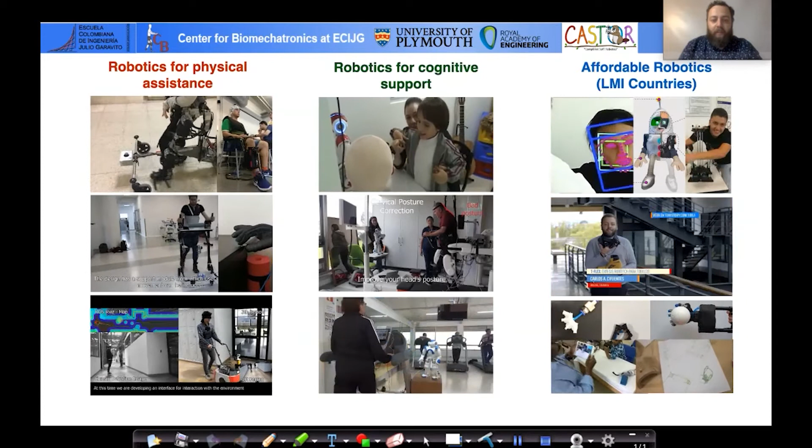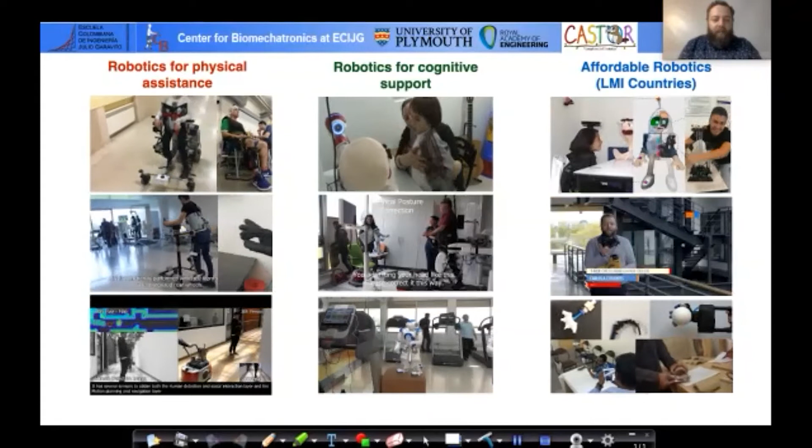So we can summarize our works in 3 lines. Firstly, robotics for physical assistance. In that part, we have been working in development of several wearable robots for the treatment of different pathologies like cerebral palsy, stroke, or spinal cord injury. You can see in the videos also exoskeletons for lower limb, ankle joints, and also hand exoskeletons. And we combine these devices with smart walkers. These devices also help patients or users in mobility and in some applications in daily life.

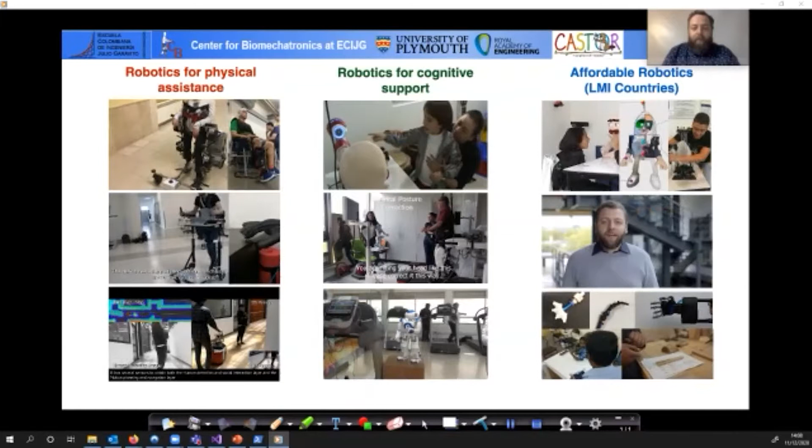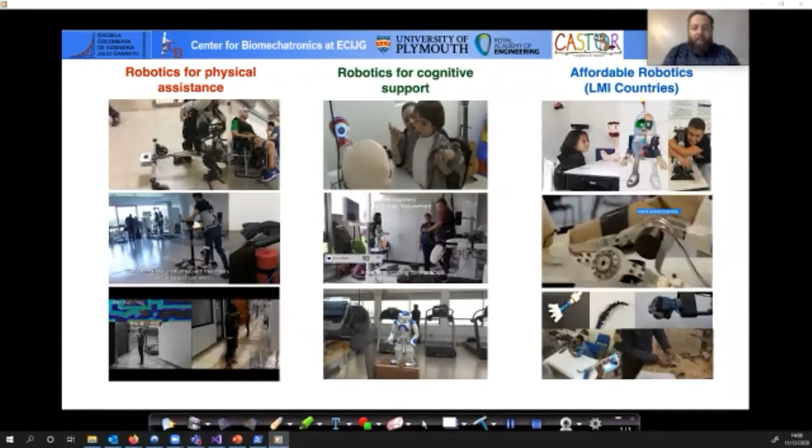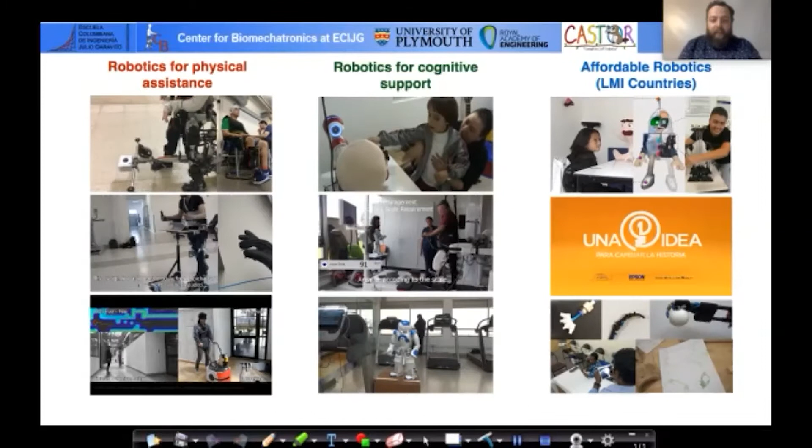In the center part, we can see robotics for cognitive support. These robots help clinicians in the daily work. Firstly, you can see robots for autism, that is the main topic today in this talk. And you can see also robotics that work with clinicians in several scenarios like neurological rehabilitation, where the social robots are focused on specific variables that are important to follow up the patients. In that case, the robot is helping the clinician measuring the posture of the patient during the treatment and encouraging the patient to perform a good posture during the treatment, which is very important in this kind of rehabilitation.

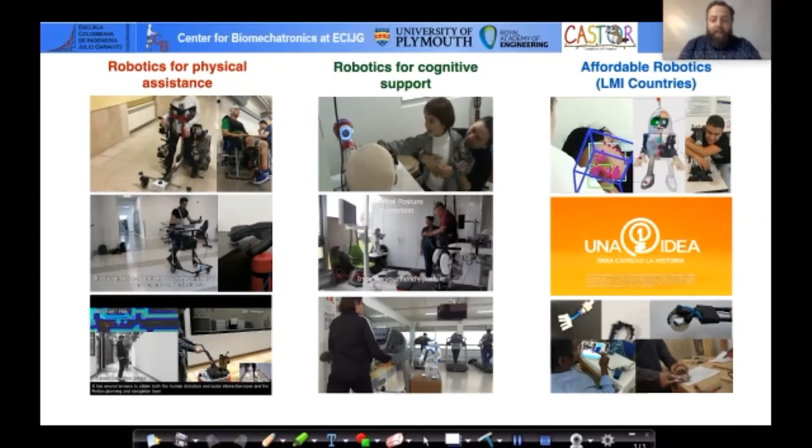After that, you can see robots supporting cardiac rehabilitation, which is also one of the works that we are working on with researchers of Plymouth University. In that field, we have integrated several sensors to monitor the patients during the treatment, encouraging them to develop the long-term treatment of rehabilitation. We have many publications in this part, and hopefully we can disclose this later.

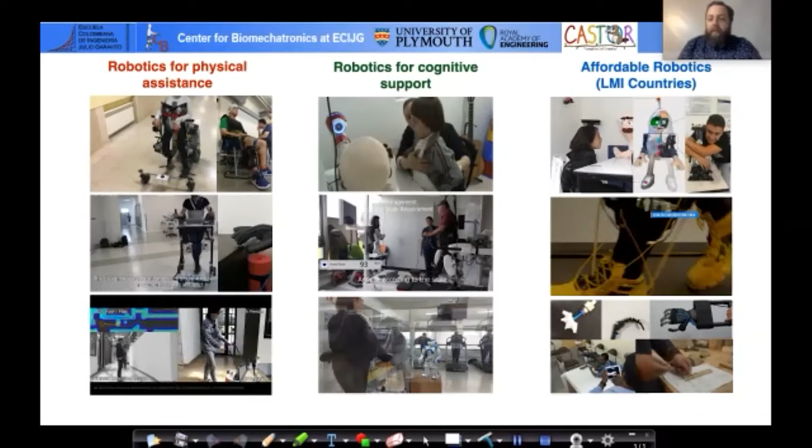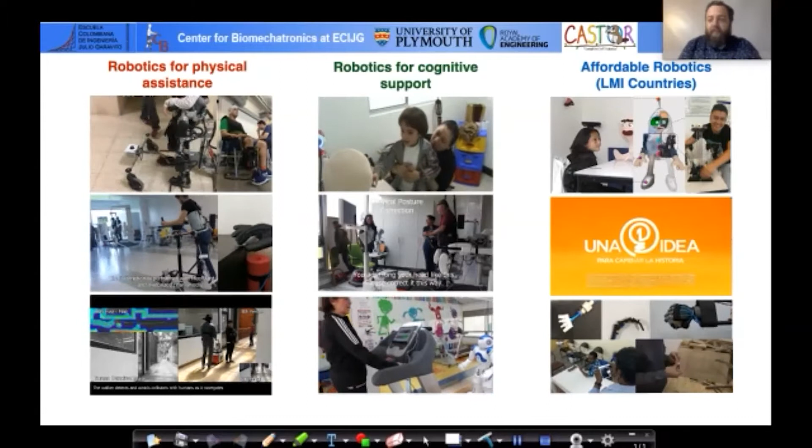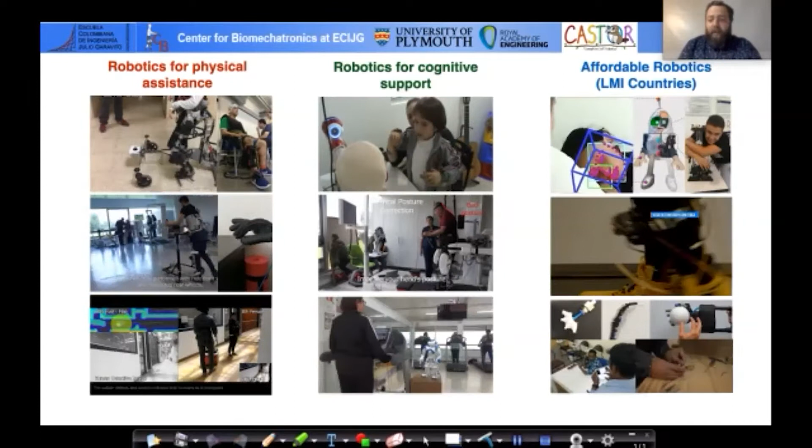In the third part, we can see affordable robotics, where we are developing open source robots in order to be transferred to clinics to develop treatments or studies in clinics and also in universities. These are affordable tools made with 3D printing and open source hardware. You can see the CASTOR robot that we will talk about today, but also T-FLEX, which is an ankle exoskeleton, which is also free access in GitHub. And also you can see a hand prosthesis that we are developing at this time.

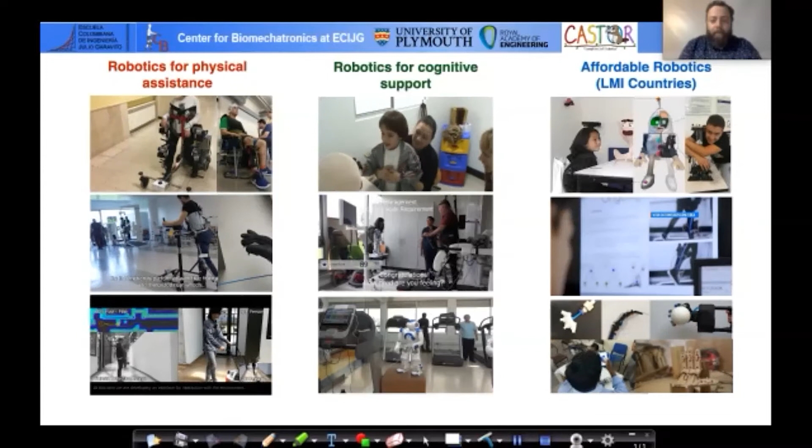So this work is impossible to do only with our group. We are collaborating with many groups around the world, some companies and some universities in Latin America, Europe, US and UK, of course, and in Japan.

Our collaboration with Plymouth University started in 2016 when we got the first project funded by the Royal Academy of Engineering with the program Industry Academic Partnership Program, Colombia, UK, which is focused on integrating one university in UK, one university in Colombia, and one company.

In that case, we collaborate with a company that develops or commercializes robotic tools in Latin America, and we developed several studies to understand the possibilities of social robots in some scenarios like neurological rehabilitation, cardiac rehabilitation, and ASD treatment. As you can see, this has been a great part of the work in our group, and this project was called Human Robot Interaction Strategies for Rehabilitation based on socially assistive robotics.

You can see in the pictures that we did many visits to Plymouth, and researchers and professors from Plymouth came to Colombia to develop seminars and research. It was a very interesting project that is still giving a lot of outcomes in research with the topic that I told before, which is the cardiac rehabilitation.

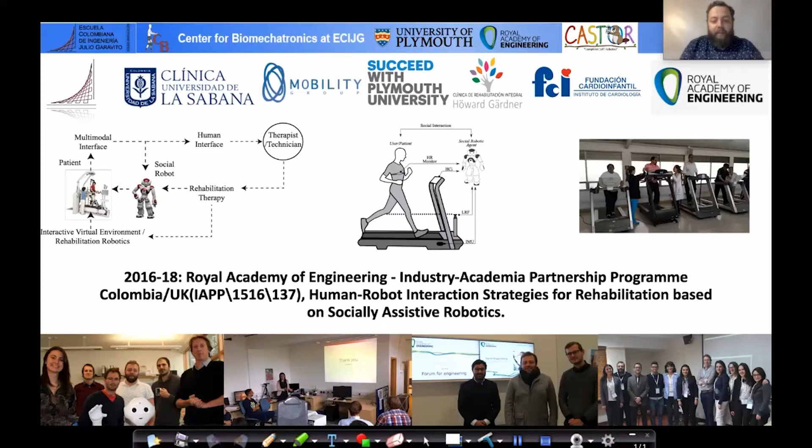One of the outcomes of this project was this study in which we involved 30 children and 12 therapists, and we analyzed how they developed the treatment, the ASD treatment, and we understood that this is a therapy that is performed almost daily during the week. And what are the interactions between the clinicians and the children?

We can see physical interactions to promote good posture, reduce bad habits, provide instructions, train emotions, and also other interactions. And we also asked the clinicians if they see the robots as useful in their work, and we saw that around 70% of the clinicians say that the robots are useful or very useful.

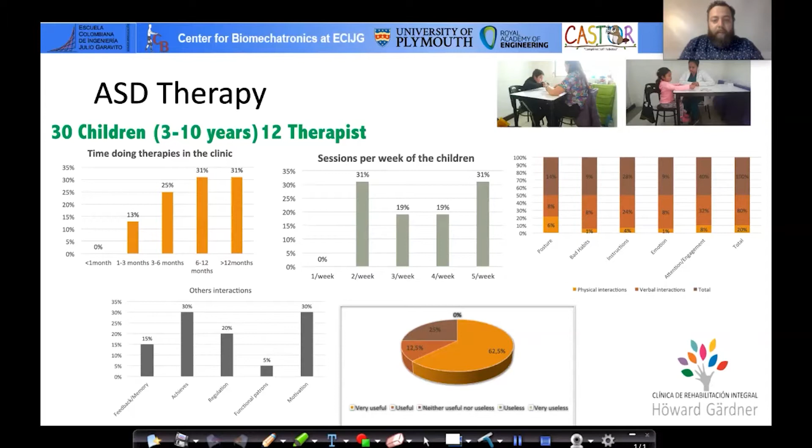We started to study the literature of socially assistive robots in autism, with experience also at Plymouth University with Professor Tony Belpaeme. There is evidence that robots assist in the diagnosis process and also improve risk factors like eye contact and joint attention, and also increase self-initiated interactions. And during therapy, robots encourage basic communication, imitation, and emotion recognition. So you can see in the video some examples of successful robots in therapy and also commercialized around the world.

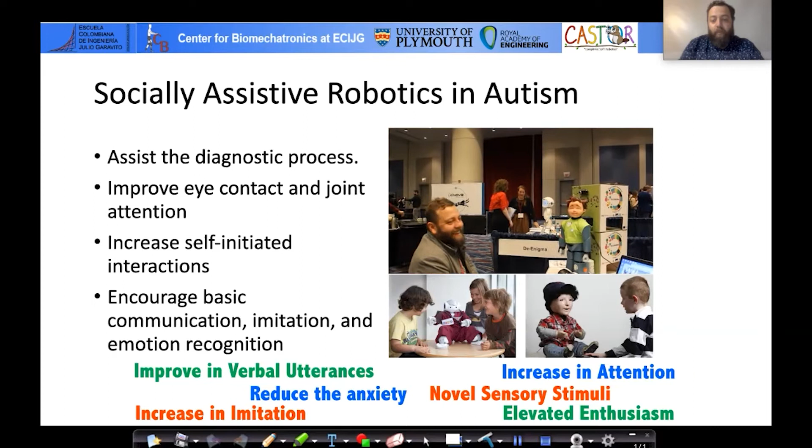And to deploy the robots in Latin American clinics, or in general in developing country clinics, is complicated because the robots are hard and stiff and unsuitable for physical interaction. So these robots can be harmful for the child or both. And we can see in the video one open source robot, which is the Ono robot that we usually use in this research, but we found that it's very fragile, and also we had some problems with the NAO robot.

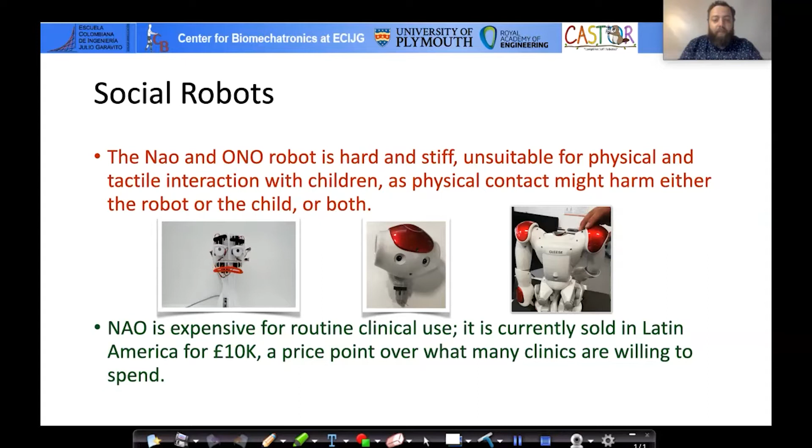We had some broken robots in the lab, and we had to send them to the US to get them recovered and back to Colombia to continue studies. So it's quite expensive, and the price in Latin America is around £10,000. So it's difficult to manage for any clinic in developing countries. So this is the main problem that we want to address with this research.

And we can see here the three objectives of this project. So we started with the design and the evaluation of a social soft robotic platform, looking also at open source platforms. The second objective is oriented to develop a soft actuation system, looking at physical interaction. And the third objective is oriented to develop sensor subsystems to monitor the interaction with the children.

So this project is mainly led by Plymouth University and Colombian School of Engineering, but there are also interesting collaborators like Tejido de Sueños, which is a company here in Medellin that develops participatory design in many devices and tools for children. They are the company partner in the project, but we also have the collaboration of UFES University, which is a university in Brazil. And the clinic is the rehabilitation clinic Howard Gardner, a clinic with 2 headquarters in Bogota, whose patients will be the main focus of this project.

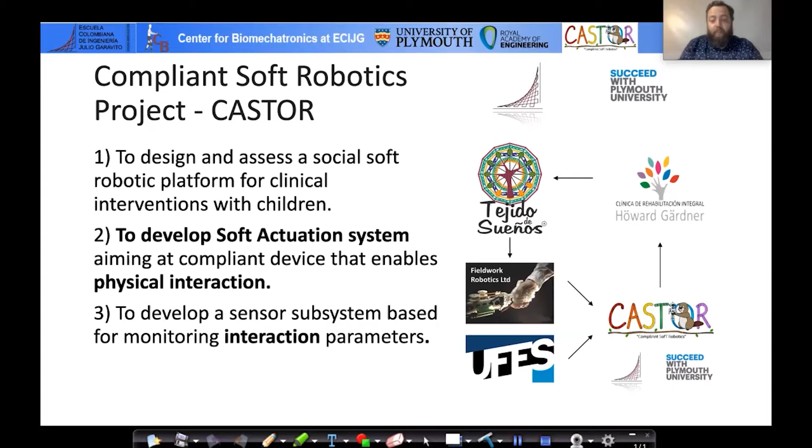We first started to explore the use of social robots using the Ono robot, developed in Belgium, and we integrated this robot and started to develop a sensor system to monitor the interaction between the child and the robot during the treatments. So we started with the joint attention assessment, where we located 3 different objects in our room, and the clinician, the psychologist, asked the child to look at the different objects in the room.

And with a multi-camera system that we developed in this project, with the help of a PhD student from Brazil, we detected the visual focus of attention of the child, and we expected to use this system at that time in the next studies. During the same time, we started to work on the design of the project, on the design of the robot that I will talk about later.

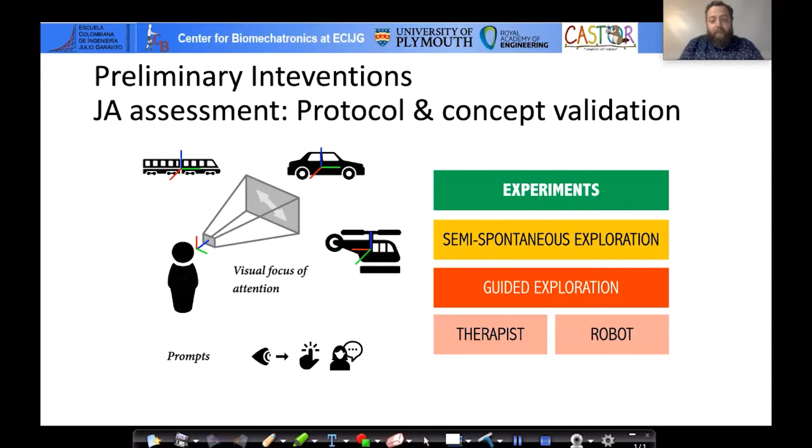So this was one of the outcomes of this project, when we developed a system to detect the face and the orientation of the child and the visual focus of attention, which we present in this article. This is very interesting because we involved a significant sample of children in this study, with two groups: one group of children with autism and one group of children with other special needs like Down syndrome.

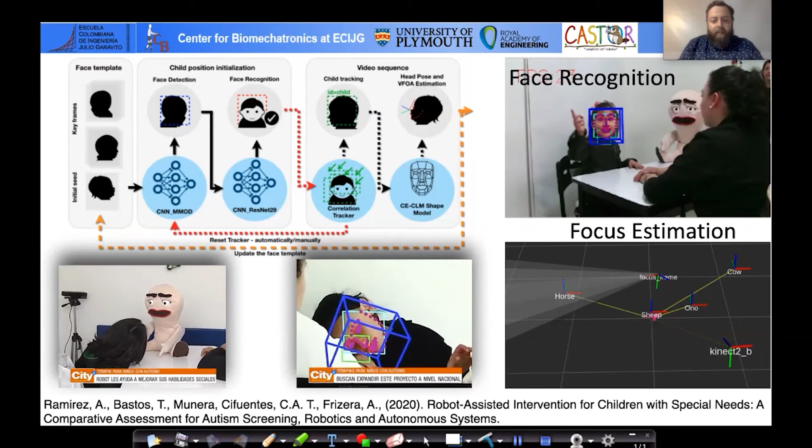And in that case, we evaluated the same therapy and we found specific behaviors of the child that we can demonstrate with quantitative data obtained from the system. And this is a very interesting outcome for the state of the art, that it's possible to detect specific behaviors in children with autism.

And so with this first evaluation, we demonstrated to the clinicians the possibility to collaborate with the robots during the therapy. And it was in part a sensitization to use robotics, to, in the next stage, start to develop the participatory design strategy with them.

But after this study, there were many research questions. One of them is the effects that we see in children with autism, that they are very interested in the robots and their performance actually increases with the robot in the therapy scenario. So we decided to develop a study over 10 sessions, where we were also curious about how relevant the role of the robot and the clinicians is in this therapy.

And we changed the role of the robot. At the beginning, the clinician had 100% of the share of the therapy, and in the second therapy, the robot started to say greetings or some words. So we started to increase the percentage of participation of the robot in every session. In the 5th or 6th session, the robot had 50% and the clinician 50% of the share of the load of the therapy, and in the end, the robot had 100% control of the therapy.

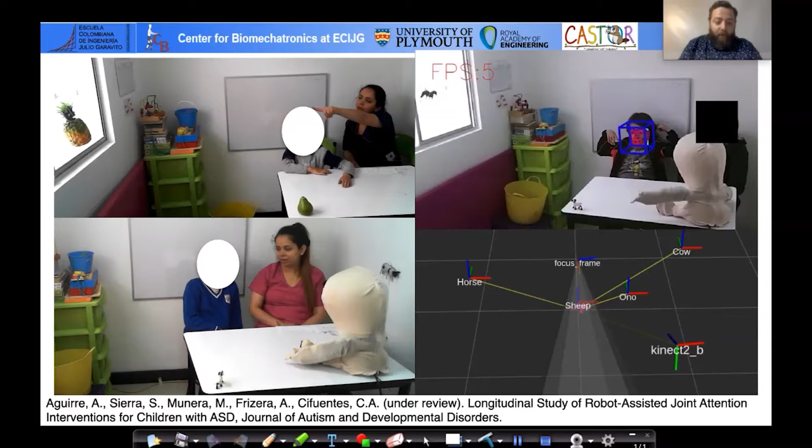So this work is now under evaluation, but we expect to discuss more after it is published, and we hope that it will be accepted. So after performing this sensitization part, some interventions with the robots, we developed a participatory design that is published in this article. And it will be presented in the next seminar with Professor Marcela and Maria Jose. They are also part of the project, and they are mostly in charge of the studies with the children and the clinicians.

So the interesting part here is that we discovered the needs and what the clinicians, the parents and the child expect of the robot, and we found some cultural aspects that are really interesting to involve in the design of the robot. So in the next seminar, you will get more details about this methodology. I just want to summarize all the outcomes of this project.

After developing the whole participatory design strategy, we found that there were three designs that children, clinicians and all the populations were interested in: one design like a robot, one more fantastic, and one like a child. And in this paper, which is also under evaluation, after performing a validation with children, we found that the robot outfit is the best option, the one children feel more attracted to interact with. But there are many details in this study that you will see in the next seminar. So we were also working while all this design part was performed.

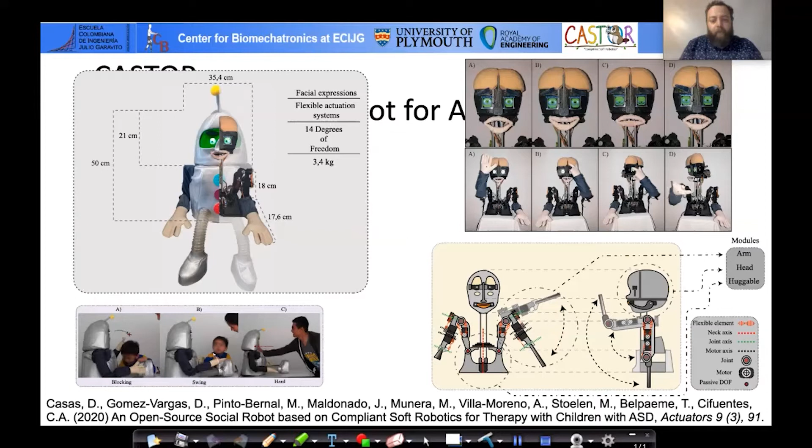At the beginning of this year, we finished a study with children where we really wanted to understand if the physical interaction has real importance in ASD therapy, because at that time we already had the robot, and we also involved a significant sample of children in this study where we compared two groups. One group that was invited to interact with the robot during the therapy, and another group that was prohibited the possibility to touch the robot.

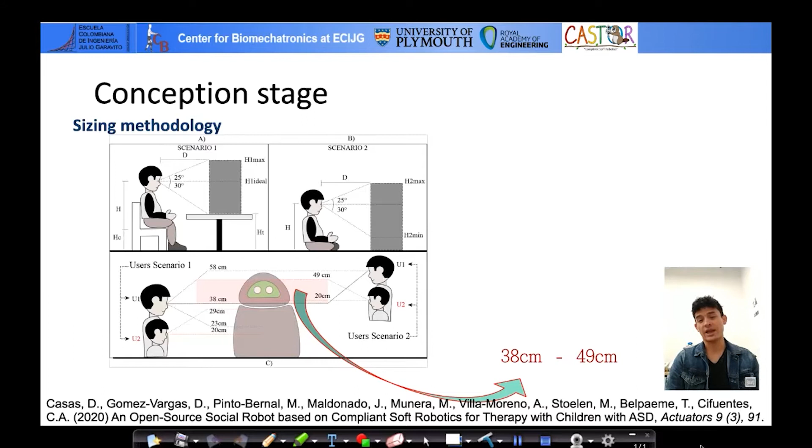Now I will talk about the development of the CASTOR robot. This robot has 14 degrees of freedom to generate the movement of the arm and neck. Additionally, this robot has 1 degree of freedom in the middle of the structure to work as a huggable structure. This robot has 3 main modules, which are the arm module, the head module, and the huggable module. Arm and head modules are series elastic actuator systems, and the other one is a pneumatic system. Those systems make the CASTOR robot a novel proposal.

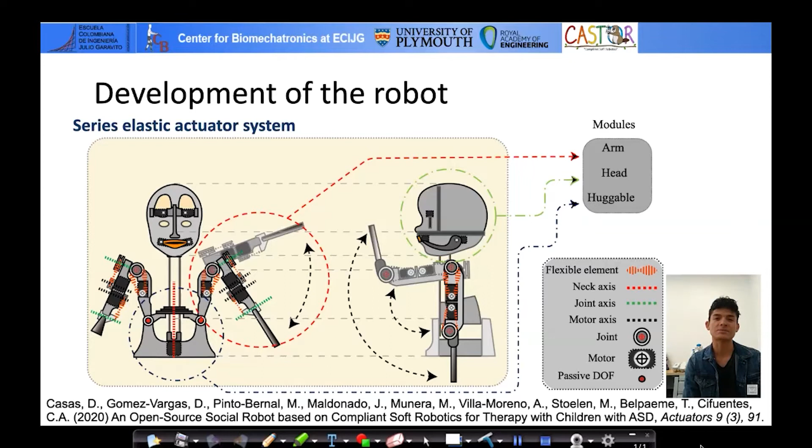This is the first module and is in charge of actuating the head of the CASTOR robot. The head is one of the most critical parts of the robot because it's big and heavy. That is where the electronic system is placed. On the other hand, it's where the children put the major part of their attention in therapy. This system has one elastic element between the motor and the head, decoupling the motor from the direct load.

The elastic element is constructed with 4 aluminum bars, and thanks to the flexion properties of this material, we can generate a part that's able to deform around the motor axis. So when each bar is deflected, our system makes a rotation, absorbing the energy from the physical interaction, as we can see in this video.

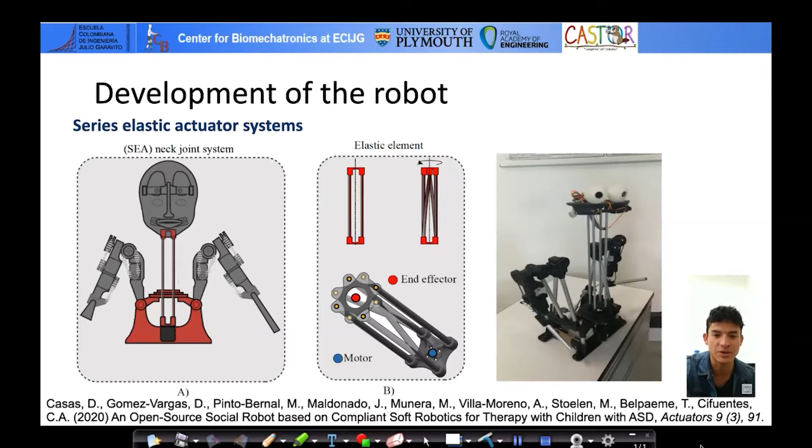The second is the arm module. This module includes 3 degrees of freedom to move the arms. This arm has 2 degrees of freedom in the shoulder and 1 in the elbow. This part of the robot also has series elastic actuator, but in this case, the elastic element works a different way.

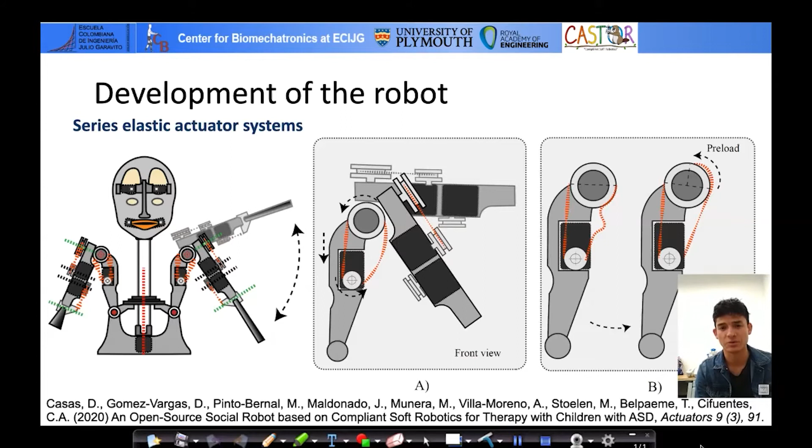The last is the huggable module. This module has a couple of pneumatic cylinders with 16 newtons each one, with the purpose of absorbing the energy from the impact or hard interaction with users. That idea is extracted from how the human body works in a moment of being hugged. The human body, thanks to the clavicle function, can deform the structure to absorb any impact, and this is the same conception of the huggable module, as we can see in the videos.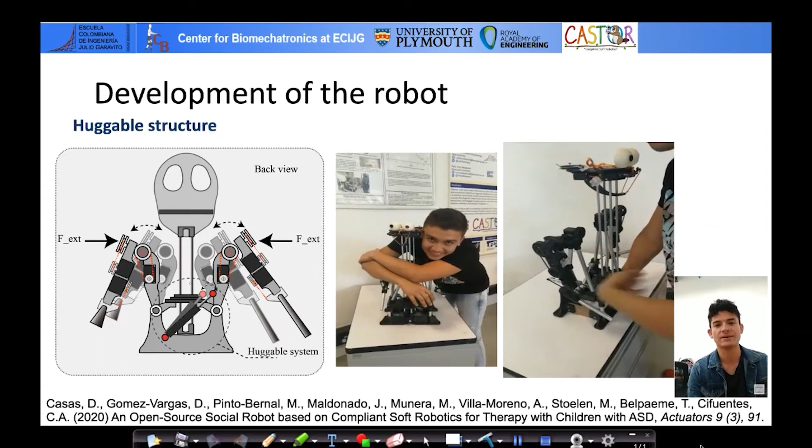Now I want to talk about the materials and fabrication method. One of the main features of the CASTOR robot is that it's so easy to reproduce. That's to say, the major part of the CASTOR's parts are a CAD that is printable in any 3D printing machine, and the rest of the parts are commercial elements, such as 4 couple of bearings and the motor screw. The CASTOR structure has 30 printable parts, and all of these parts are fabricated in PLA, that is a resistant and easy to find material.

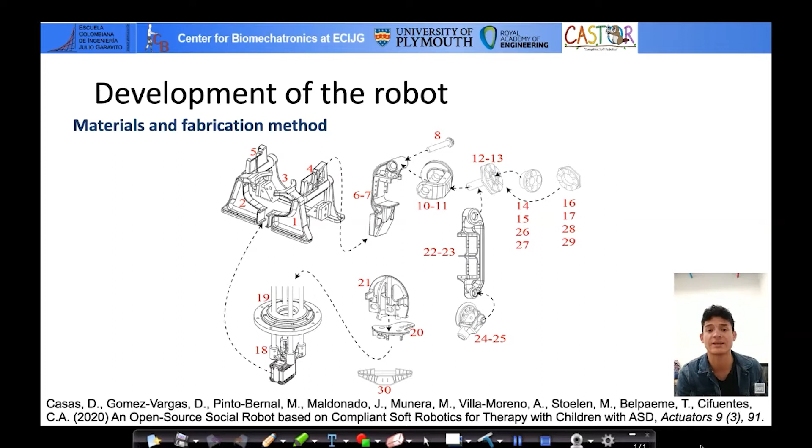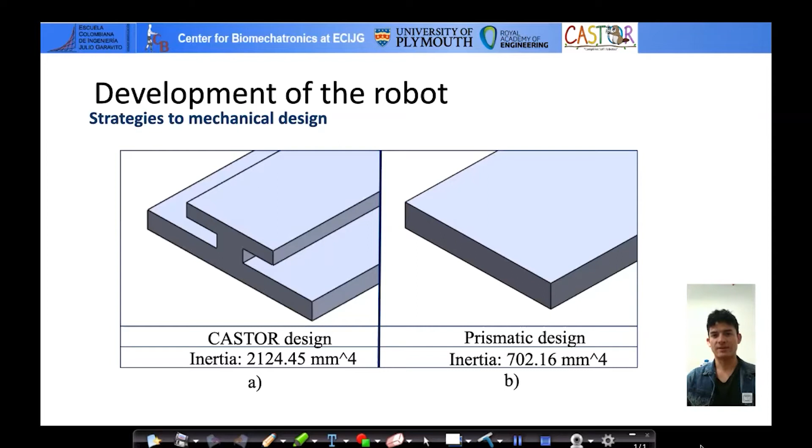This is the design strategy of the CASTOR robot, and this is based on displacing the mass of the part as far as possible from the neutral fiber. The neutral fiber in a flexion test is less stressed, therefore putting the mass in this segment is to lose material. The idea is to put the same mass in the disposition where the inertia is increased, as we can see in the figure. You can see the behavior of the two parts with the same mass and the same material, also with the same test load.

With this figure, it's possible to compare and to see that the stress in the prismatic design is so much more than the CASTOR design. That shows that it's more resistant and rigid to manufacture a part with this methodology.

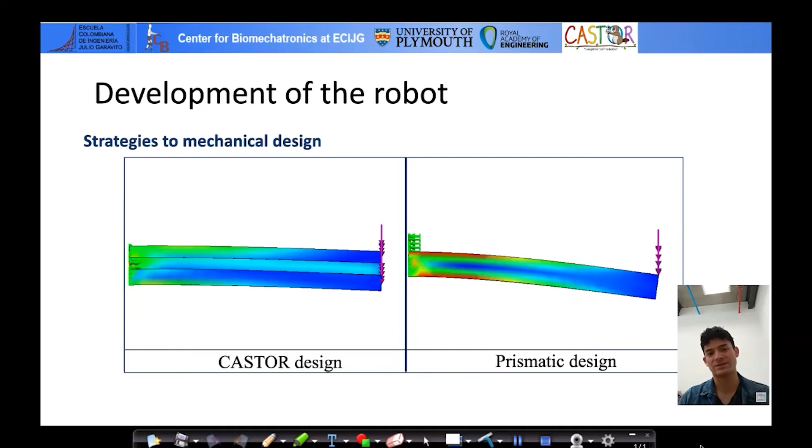This is the mechanical study of the series elastic actuator system that the CASTOR robot has. This test was made with the purpose to evaluate the behavior of the elastic element of each system. The setup is a couple of motors coupled with an obstructed joint. One of the motors has the elastic element between the motor and the joint, and the other one is attached directly to the obstructed joint. The system of the motors is able to give data of the load at each time that shows how much effort the motor is making.

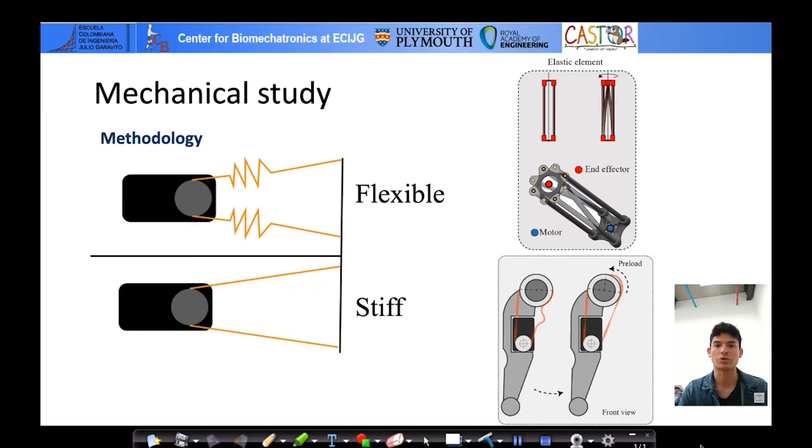These are the results of the mechanical study. We can see in black lines the behavior of the motors without the elastic element. On the other hand, in orange, the CASTOR system. This trial is based on actuating the motor, increasing the angle in 10% until arriving at the maximum range of the joint. The first thing that I think is important in the result is the quantity of energy that the CASTOR system is absorbing due to the load in the motors. With the elastic element, it's so much less than the load of the motors directly coupled.

On the other hand, we can see that the response that we expected at the moment to design the actuation of this system is reflected in this test, where less load is used at the moment to transmit the torque, as above mentioned, with the human tendons. Which is so important in a structure to keep physical interaction with the user without any risk. And this, I think, is a good thing to take into account at the moment to design different kinds of social robots.

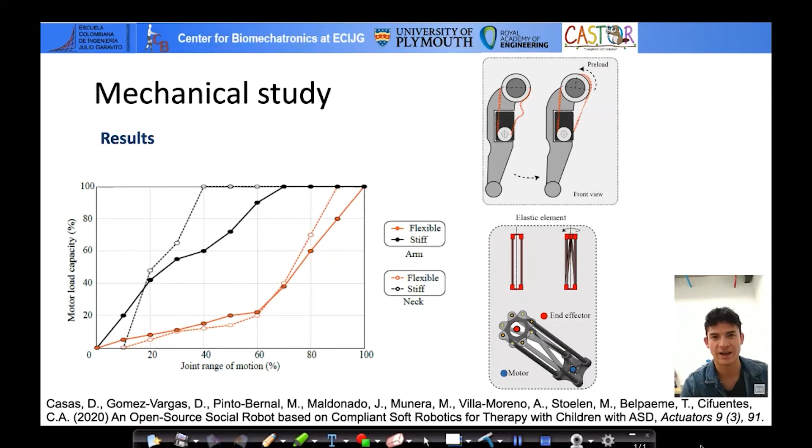Hello everyone, this is Juan Camilo Maldonado from CASTOR Project. I am an electronic engineer from the Colombian School of Engineering Julio Garavito, and I'm going to talk about all the electronics of the CASTOR Robot.

Okay, let's start. How to power CASTOR. Basically, CASTOR needs 12 and 5 volt power supplies, but we designed a distribution board to only use one power supply. This distribution board has a regulator to convert 12 volts to 5 volts, has USB connectors for the Raspberry Pis, and terminal blocks to power up the OnoHat board and the Dynamixel motors.

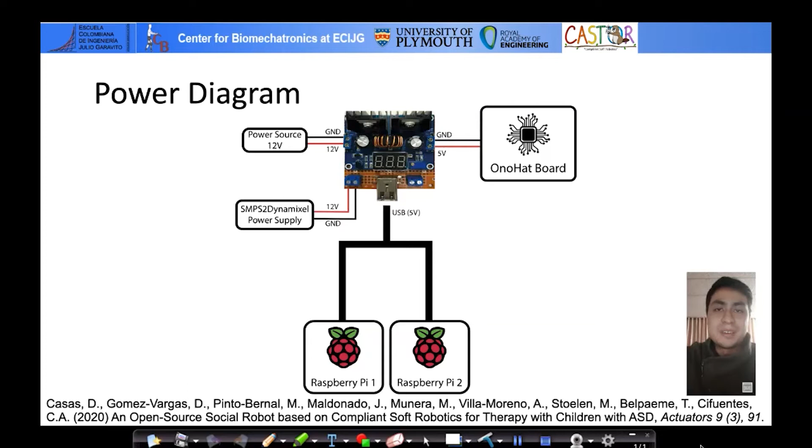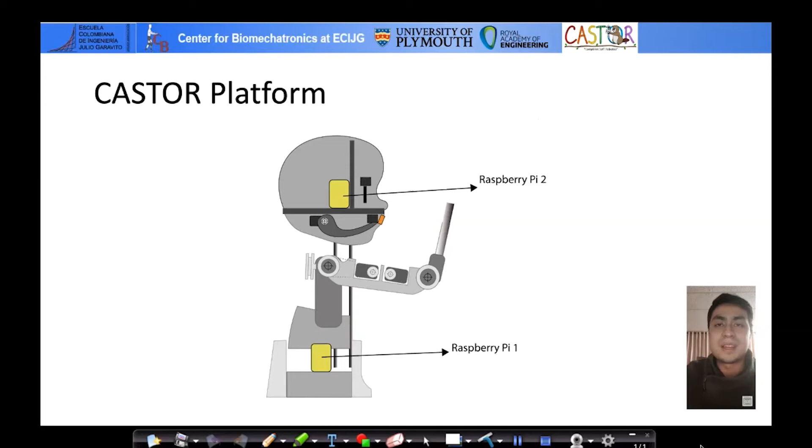Now, the CASTOR platform. CASTOR integrates two Raspberry Pi Model 3B Plus boards to control the hardware. Raspberry Pi 1 is located at the bottom of the robot and Raspberry Pi 2 on the top of the robot. Raspberry Pi 1 controls the Dynamixel motors and the OnoHat board. These Dynamixel motors generate arm and neck movements, and the OnoHat board is a Raspberry Pi HAT capable of controlling a speaker, touch sensors, and the servo motors, in this case the face motors.

Raspberry Pi 2 controls the eyes bonnet board. This eyes bonnet manages 2 LCD screens, the eyes of the robot. With this board we can change the color of the iris, the color of the eyebrows, the size of the pupil, and direct the gaze. For Raspberry communication, we created a Raspberry Pi network, where Raspberry Pi 1 works as a master and Raspberry Pi 2 works as a slave. And for easy connection to CASTOR, Raspberry Pi 2 generates a Wi-Fi network.

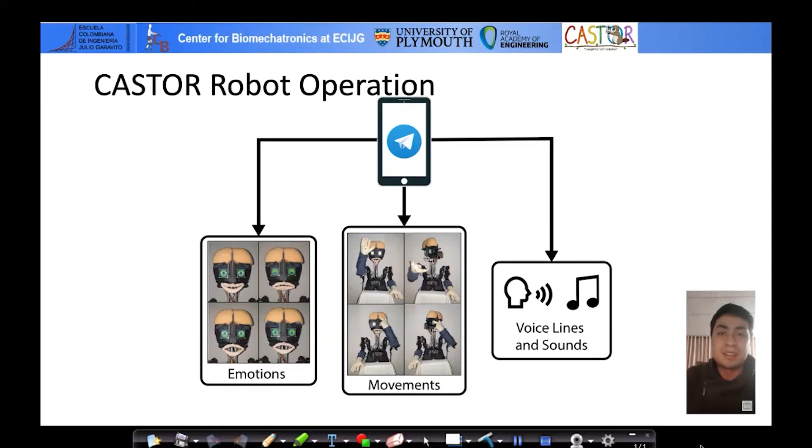For CASTOR operation, we use Telegram. Telegram is an easy tool for generating interfaces. With Telegram, you can control the whole robot: emotions like happiness, sadness, anger or surprise, and movements like greet, dance, or pointing someplace. Finally, we can control voice lines and sounds. This is a short video of CASTOR operation.

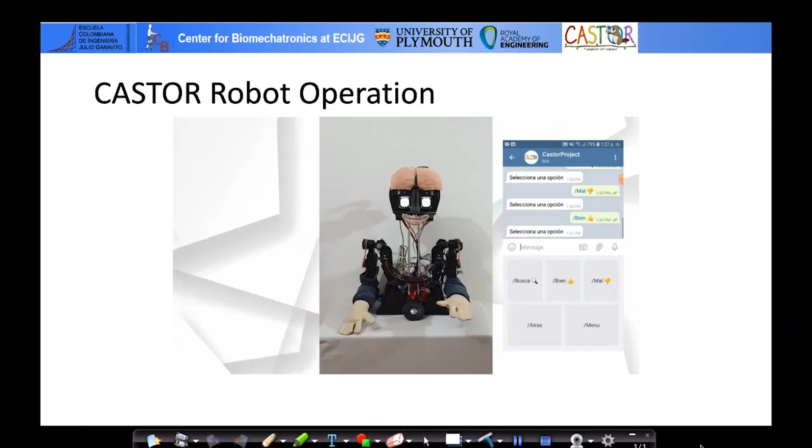The CASTOR software is based on Linux distributions and ROS. All the functionalities and communications are accessed through nodes, topics, and services, all available on the CASTOR Robot repository. The ROS architecture is mainly composed of 5 nodes: the Telegram node, where we can create interfaces; the motor behavior node for established movements and Dynamixel motor operation; the facial behavior node to control face motors and generate emotions; the eyes behavior node to control the gaze and pupil size; and finally the speaker node to control sounds and voice lines.

So this was the presentation. Finally, I would like to invite people interested in the project to visit the articles already published, to read them, and also ask us any questions that you have. We still have some time in the seminar.